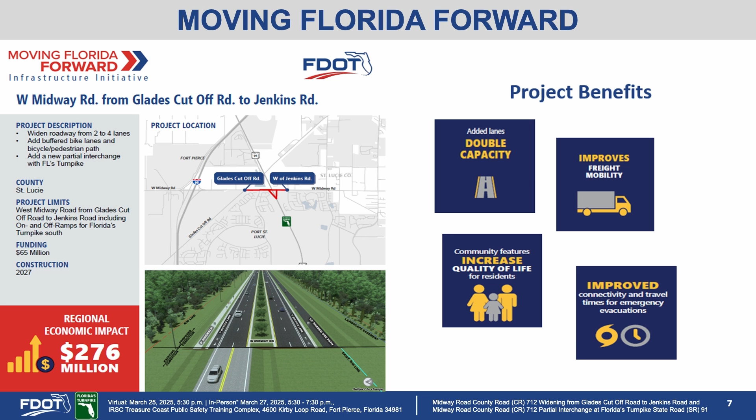Slide 7. Moving Florida Forward. The Moving Florida Forward initiative benefits for the Midway Road, County Road 712 widening from Glades Cutoff Road to Jenkins Road project are added lanes for double capacity, improved freight mobility, increased quality of life for residents, and improved connectivity and travel times for emergency evacuations.

Slide 8. Agenda. Tonight's agenda includes public notice, FDOT's non-discrimination policy and public involvement, the project location and overview, proposed improvements, construction impacts, the project schedule and cost, questions and comments, followed by the contact information and closing before we adjourn.

Slide 9. Public notice. Public notice for this meeting, including information on how to access the meeting platform, was provided in several ways. There was an ad placed in the Florida Administrative Register. Notice was also provided in the form of a public information meeting flyer to property owners and tenants in the project area. A meeting notice was also provided via the Florida Department of Transportation's project webpage and social media platforms, and via email to the project's contact list.

Slide 10. Non-discrimination policy and public involvement. Slide 11. Non-discrimination policy. The Florida Department of Transportation is required to comply with various non-discrimination laws and regulations, including Title VI of the Civil Rights Act of 1964. Public participation is solicited without regard to race, color, national origin, age, sex, religion, disability, or familial status.

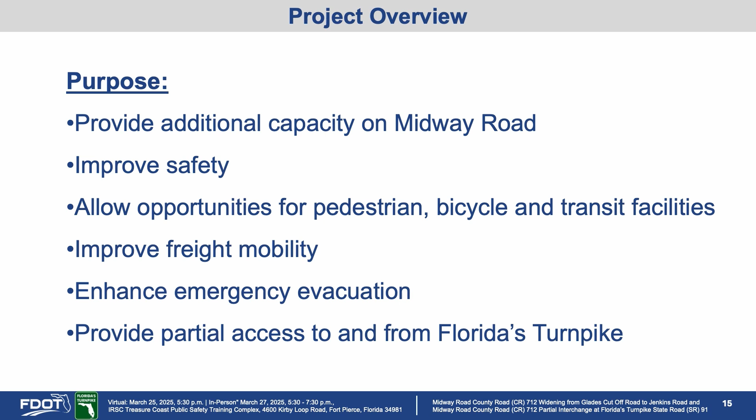Slide 18. Summary of proposed improvements. Approaching the bridge over Florida's Turnpike, the profile of the roadway will be raised, resulting in the need for retaining walls, concrete barriers, and pedestrian protection walls. The median will be widened to accommodate dual left turn lanes at the ramp terminals. All other typical section elements will remain the same.

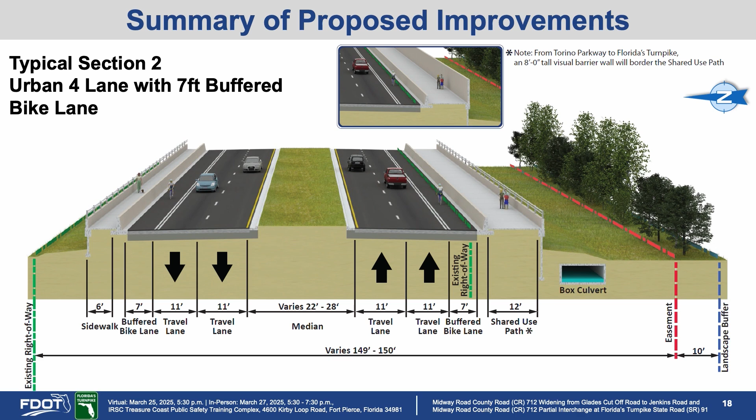Slide 19. Summary of proposed improvements. This is a graphical depiction of what Midway Road Bridge over Florida's Turnpike will look like when it's widened to 4 lanes. This is a typical section and is shown from the perspective of looking to the east towards US 1. The key features shown in this typical section are: there will be 2 11-foot travel lanes in each direction. There are 2 11-foot left turn lanes in the westbound direction. The eastbound travel lanes will be separated by a raised concrete traffic separator.

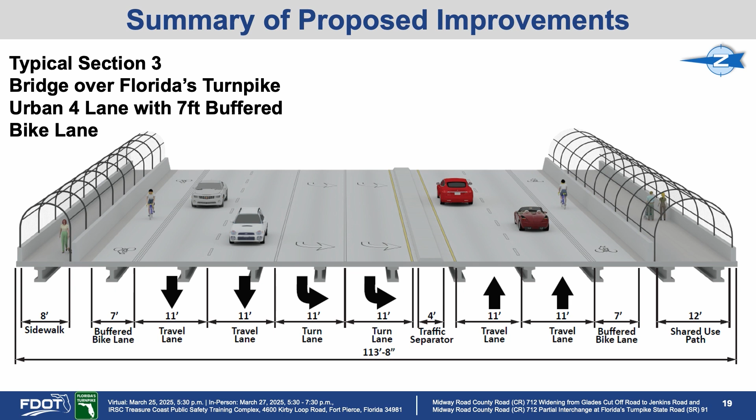7-foot buffered bike lanes will be provided in both the eastbound and westbound directions. An 8-foot sidewalk will be built on the north side, adjacent to the westbound travel lanes, separated from traffic by a concrete barrier, and fully enclosed with fencing. A 12-foot shared use path will be built along the south side, adjacent to the eastbound travel lanes, separated from traffic by a concrete barrier, and fully enclosed with fencing. The posted speed will be 45 miles per hour.

Slide 20. Project limits. Glades Cutoff to Torino Parkway. This image shows the very beginning of this widening project. The pavement reconstruction will begin just east of the Florida East Coast Railroad. The project will connect to the existing 4-lane section and carry them east through the project.

At the Torino Parkway intersection, an exclusive right turn lane will be provided from eastbound Midway Road to southbound Torino Parkway. The eastbound and westbound left turn lanes will be replaced and extended as dictated by the latest traffic analysis. The signal will be replaced with a new signal mast arm. Please note, this design will align with the current improvements being constructed along Torino Parkway by City of Port St. Lucie. Lastly, an existing pond shown in the light blue shading will be modified to treat the additional stormwater runoff from the improved roadway.

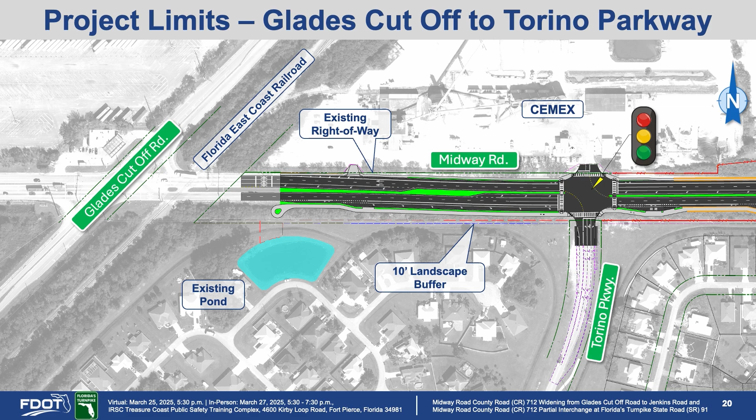Slide 21, Project Limits, Torino Parkway to northbound off-ramp. Continuing east, this image shows the proposed layout between Torino Parkway and the new bridge over Florida's Turnpike. Note the extended westbound left turn lane for Torino Parkway. Additionally, a bus bay will be provided east of Torino Parkway for future transit service. New signalized intersections will be added to the intersections of Midway Road and the proposed southbound on-ramp and northbound off-ramp.

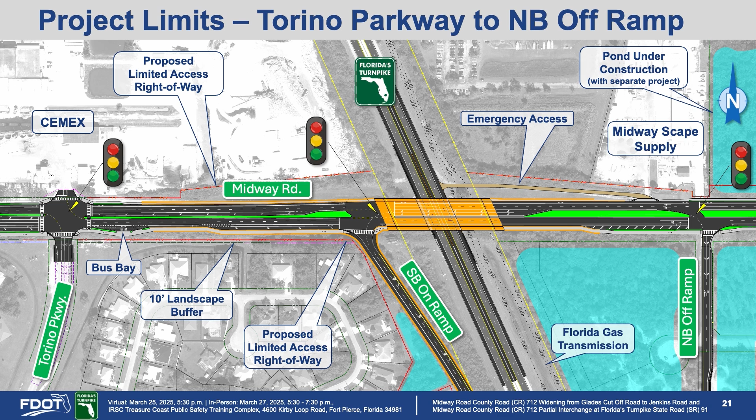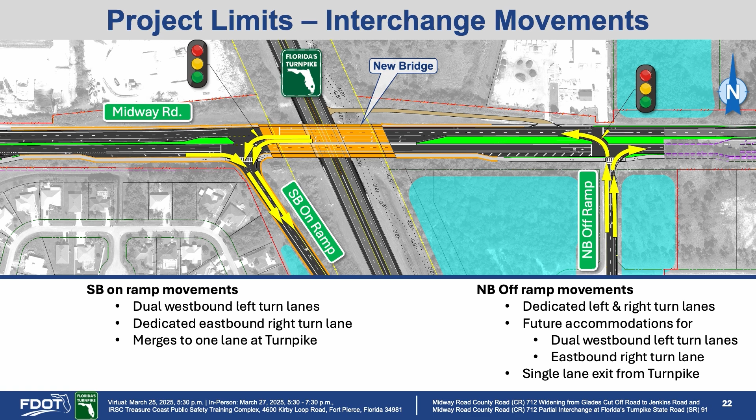Slide 22, Project Limits, Interchange Movements. This image shows the various movements within the interchange. Northbound off-ramp movements: dedicated left and right turn lanes, future accommodations for dual westbound left turn lanes, eastbound right turn lane, single lane exit from Turnpike. Southbound on-ramp movements: dual westbound left turn lanes, dedicated eastbound right turn lane, merges to 1 lane at Turnpike.

Slide 23, Project Limits, Turnpike to Jenkins Road. Continuing east, this image shows the proposed layout east of the Midway Road Bridge over the Turnpike and the end of the project connecting to the Midway Road section currently under construction from Jenkins Road East to Selvitz Road.

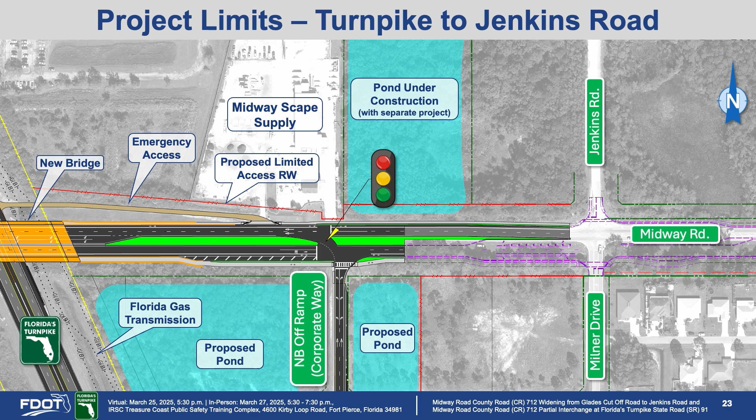The existing Corporate Way intersection will be replaced by the new signalized northbound ramp terminal. This intersection has been designed to accommodate the construction of the future ramps to the north of the interchange by simply constructing the additional left turn lanes. The through lanes on Midway Road will not be impacted. Finally, new ponds will be constructed to treat the additional stormwater associated with the proposed improvements.

Slide 24, Project Limits, Midway Road Access Management. In the current configuration along Midway Road, vehicles are allowed to access both driveways to Midway Scape Supply as shown with the green arrows. The proposed improvements will cause changes for these 2 driveways.

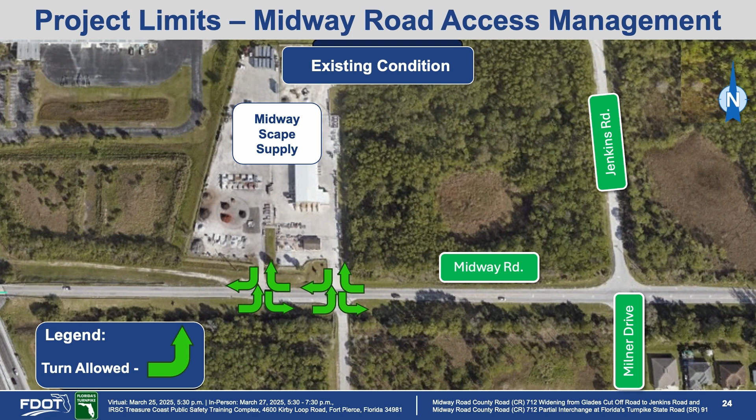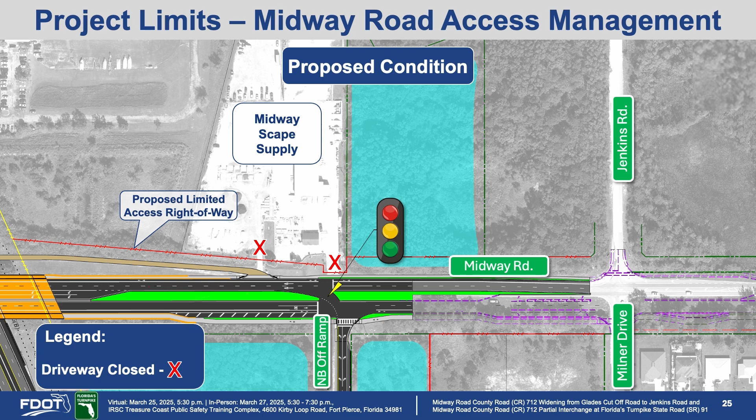Slide 25, Midway Road Access Management. With the introduction of the interchange that connects to Midway Road, it now requires a limited access right-of-way on the north and south side of Midway Road from east of Florida's Turnpike to Jenkins Road. This will close the 2 existing driveways from Midway Road to the Midway Scape Supply business. Coordination is ongoing for this access change as part of the right-of-way acquisition phase.

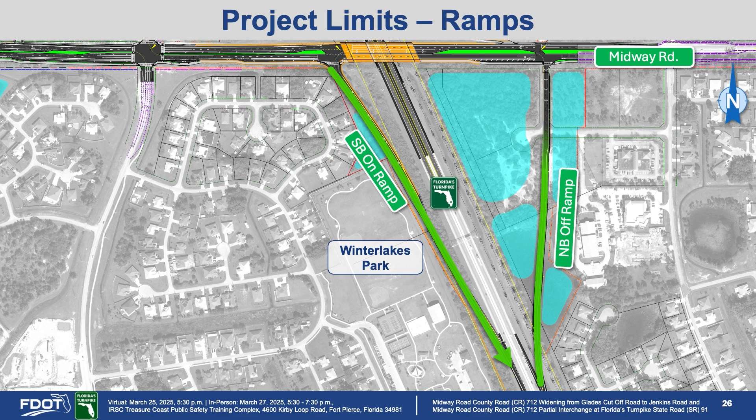Slide 26, Project Limits, Ramps. As discussed previously, 2 new ramps will be built as part of this project to connect Midway Road to Florida's Turnpike. A new on-ramp is proposed from Midway Road to southbound Turnpike. It will start with 2 lanes and merge down to 1 lane before entering Florida's Turnpike. Also, a new off-ramp is proposed from Turnpike northbound to Midway Road. It starts as 1 lane off Florida's Turnpike and splits into 2 lanes near Midway Road.

Slide 27, Proposed Improvements. Here is a rendering of the proposed improvements. North is to the right on this slide. A new on-ramp is proposed from Midway Road to southbound Turnpike. A new off-ramp is also proposed from Turnpike northbound to Midway Road.

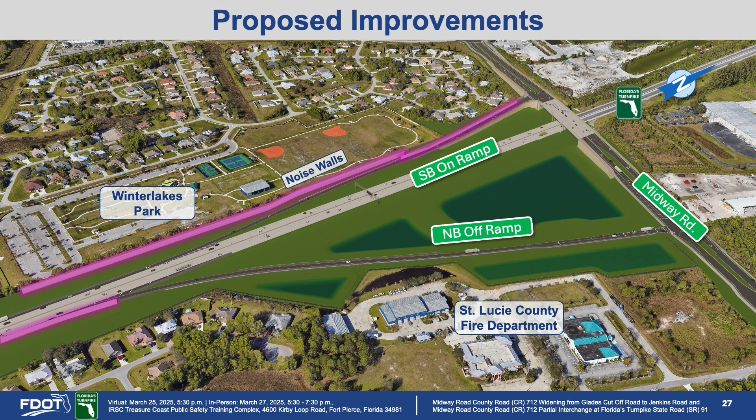Noise walls are proposed in this area as shown. A 22-foot noise wall will be built on the Turnpike southbound next to Winterlakes Park. An 8-foot noise wall will be built on the proposed retaining wall on the proposed southbound on-ramp. Lastly, a 14-foot shoulder-mounted noise wall will be built on Turnpike northbound.

Slide 28, Proposed Improvements. Here is a rendering of the proposed improvements looking at a slightly different angle. North is to the left on this slide. Noise walls are proposed in this area for the community in the southwest corner of the proposed interchange. An 8-foot noise wall is proposed on top of the retaining wall for the proposed on-ramp from Midway Road to Turnpike southbound. A visual barrier is also proposed from the start of the ramp to the west of Midway Road.

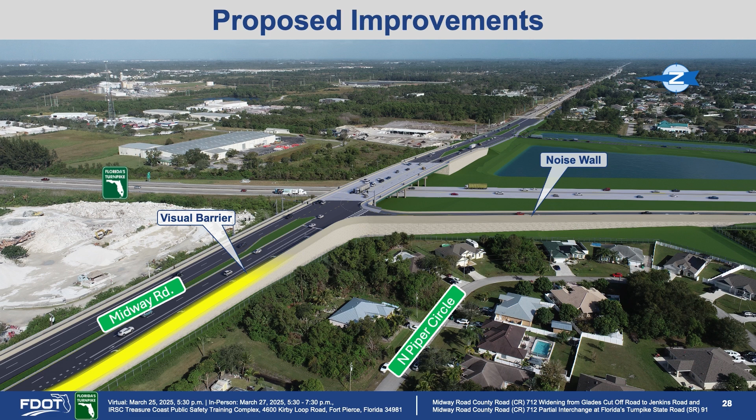Slide 29, Noise Wall Policy. In addition to project improvements shown, noise walls will be installed in some areas within the project limits. All noise assessments are carried out in accordance with FDOT policy, which is based on federal and state regulations. For walls to be included in the design plans, they must meet FDOT acoustical criteria and must be constructible.

The proposed noise wall locations from the draft noise study are available to view on the project boards within the meeting room, as well as the project website. For more information regarding the noise wall evaluation process and approach, please scan the QR code to view the Turnpike Enterprise's traffic noise video.

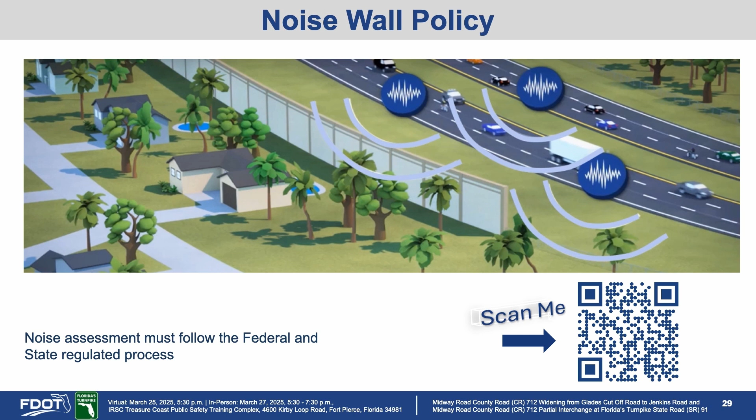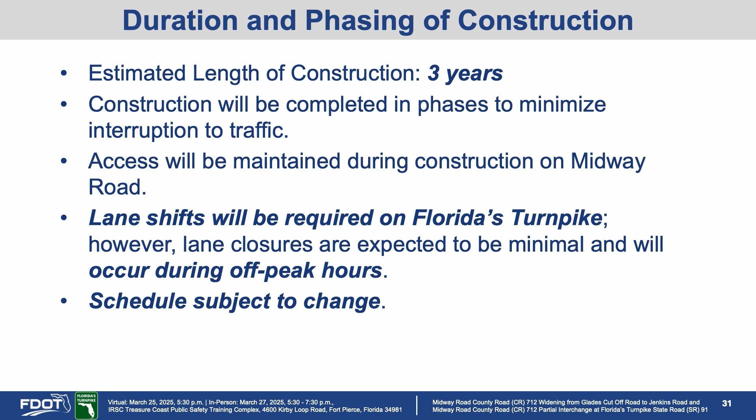Schedule subject to change. Slide 32. Proposed detours for bridge construction. Construction impacts on Florida's Turnpike are expected to be minimal. The traveling public should expect to see lane shifts in the vicinity of the Midway Road Bridge with some nightly lane closures. The one exception to this is during the Midway Road reconstruction. Overhead work and bridge demolition, including beam placement, deck pours, etc., cannot be conducted over active traffic.

As a result, a detour utilizing I-95 from State Road 70 to Southwest Gatlin Boulevard will be implemented. The detour is anticipated to be used at night during off-peak hours for several nights. Please note, the bridge will be constructed in phases, thus the detour may not occur over consecutive nights. Temporary traffic control plan is subject to change.